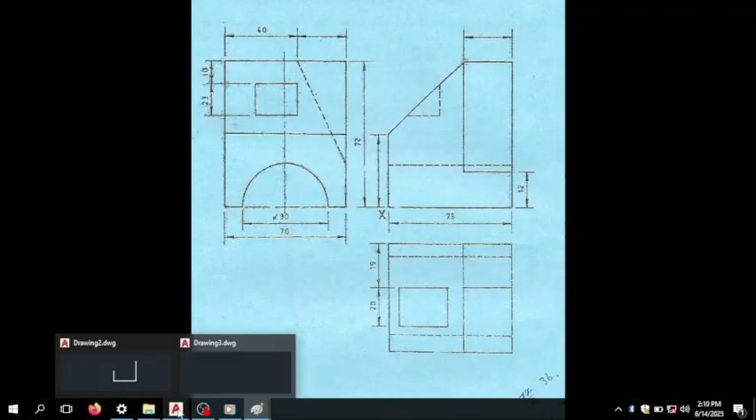Okay, so we are going to start with that. So we pick a line, and then pick a line. So our first point was 78, enter.

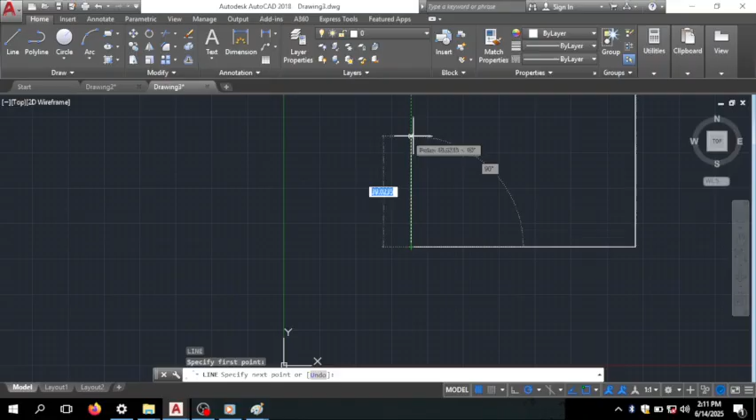Our point was 72, enter, and then 30, enter, and then escape, enter, from here was 36 because it's a half of 72, enter, and then we join here, join there, enter. So this is what you see on the front elevation.

Okay, so let's go to the end elevation where it is more detailed, and then we're gonna use the end elevation to abstract the image on the front elevation.

So this is the end elevation on this side here. As you can see, it's 40 from here up to a point somewhere there, and then there's a gap which has been left, and then there's this part here which you see on the end elevation, and then 70, and then there's something like a semicircle down there.

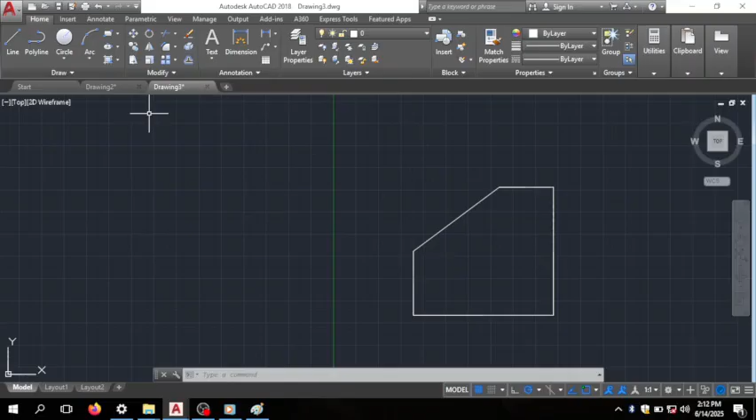Okay, so you come on this icon here which says isometric draft. Now it's off, you put it on, and then you select ISO left. Mine was default on ISO right, so you select isometric left.

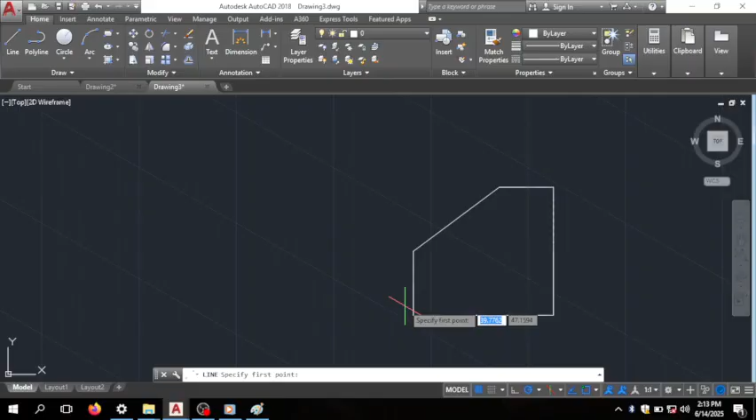So on ISO left, you pick a line, and then you start from a point somewhere there. So what were the dimensions? It was 70 on this side, and then upward it's 72.

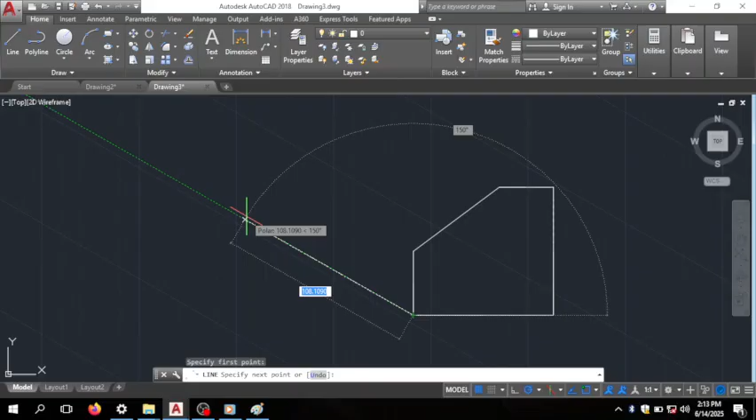So you come back on this, so it's 70, enter, upward it's 72 -- no, it's not 72, that's 72 first.

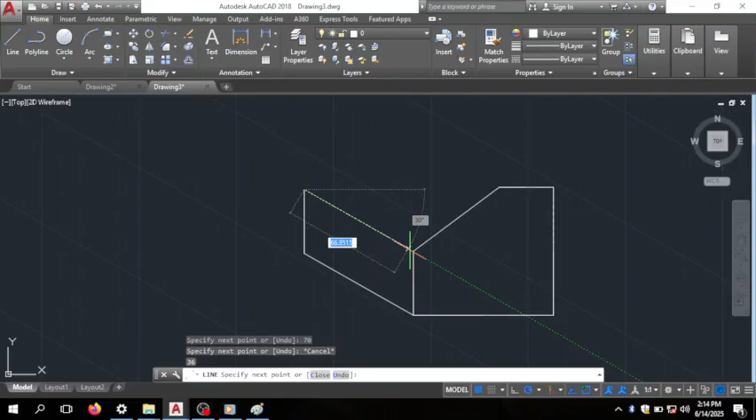This point here, up to a point here, it's 36, and then this point here, up to a point here, is 36. So we are going to pick 36 first, 36, enter.

So from a point here to a point there, it's also 70, enter, and then point there. So pick a line again from this point here, it's 30, enter, and then you join this line here.

So as you can see, our object is already appearing in a 3D manner. Our object has started already appearing in 3D manner, but it doesn't mean that we are done already. We're just on the first part.

So let's look at our image. Let's go back to our first angle projection. So if you look at this image, there's this semicircle here, which diameter is 30 centimeters, 30 millimeters, and then as you can see, there's a dotted line here, which means this hole here, or this semicircle, or this sphere, touches from this point up to the end point of this.

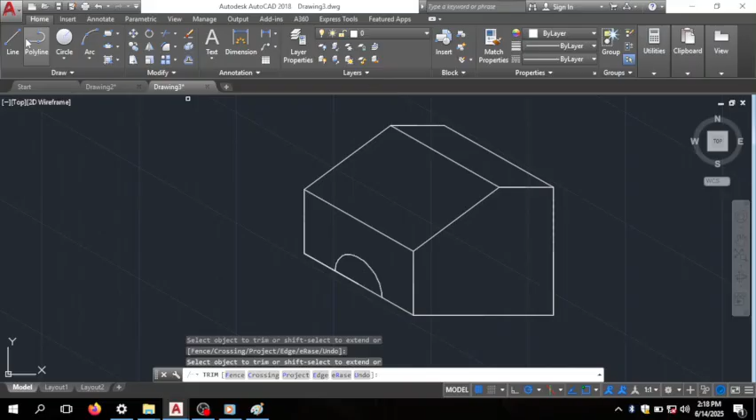Okay, so I come and select trim, and then you press enter just to trim away. You don't go on and start selecting the whole object. So as you can see, I've deleted that part there.

So I pick a line, and then from this point somewhere here, on its center. Okay, so from here to somewhere here is 70 degrees, 70 millimeters, sorry, with the degrees. Then I join there, and then from here to a point here, I just want to get the whole object.

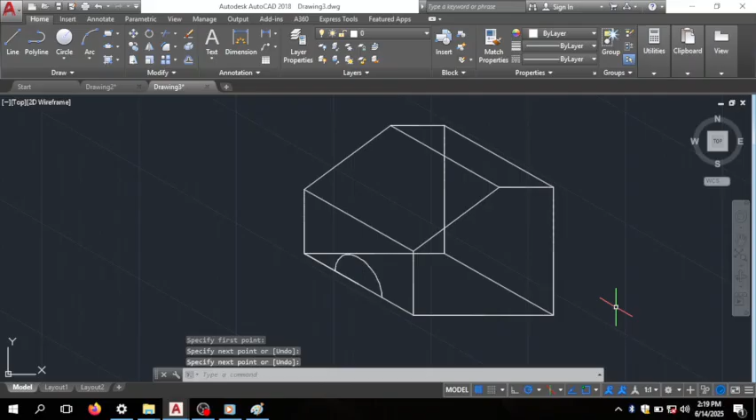Okay, now this is I want to draw here, come to a point here, so from here to here, how many centimeters were there? It was 78 from here to here, so 78.

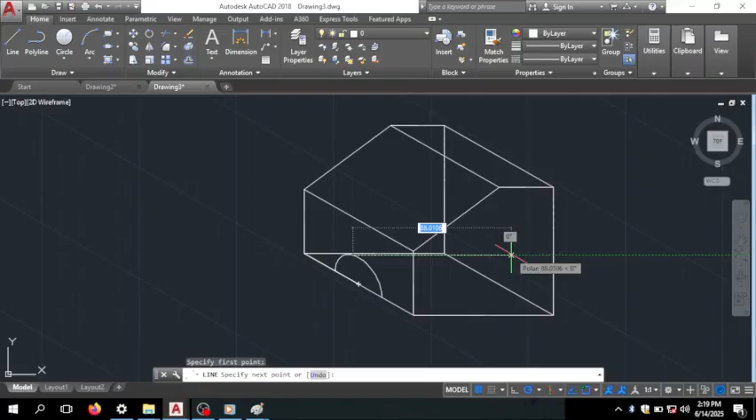So from here to a point here, it's 78 centimeters, 78 centimeters, 78 centimeters, and then I press enter.

Okay, so I pick another circle, axis end, the point, yeah, where the small rectangle appears is actually center of the circle. I have selected isocircle, so isocircle, select the point, specify the center of the circle, so specify the radius of the circle is 15, and then I come and trim, enter.

So you can see how the object is starting to look like, really look like. And then I pick a line. Let me just show you how the object appears, how the object actually is. So I pick a line there, and then enter, and then I pick a line, and then enter there.

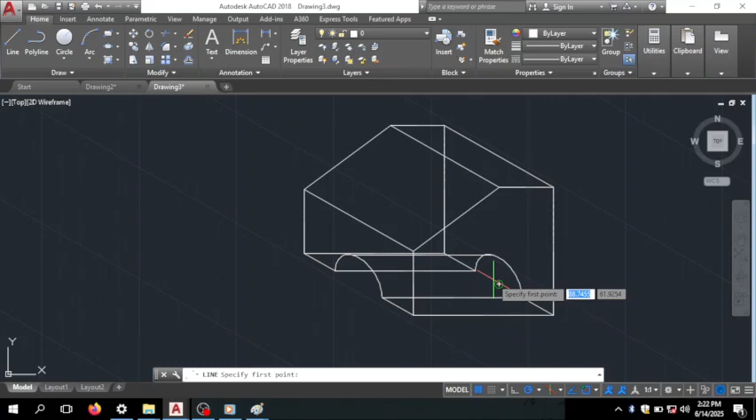If you come at this point here, there's a point here. So we want to show there's a hidden line along this block somewhere around here at the top. There's a hidden line at the top there, which said 40 centimeters.

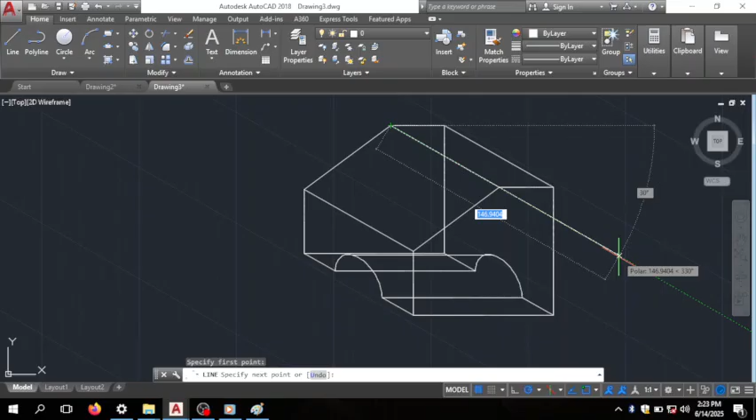Go back to our drawing and start looking. So from here to a point there, there's 40 centimeter. A line slanting until it touches the base of this circle, around somewhere there. 40 centimeter, a line slanting, so 40 centimeters from here. 40 centimeters, 40 millimeters, I mean. Why do I keep saying centimeters?

40 millimeters, okay, pick a line. You have already entered 40 millimeters. Let me just trim that one out. Enter. Let me just trim this one out. Let me select trim again.

Trim this one out. Okay, sorry for that. Trim this one out. Enter. Then okay, trim. Enter. Click this one. Okay, so from here, line, pick a line at this point here, touching at this circle there.

40 centimeter. Have you gotten how I've done it? And then so now we must delete this other part. We must delete this. So from this point to this point where it touches the circle at the circumference is 40 centimeters.

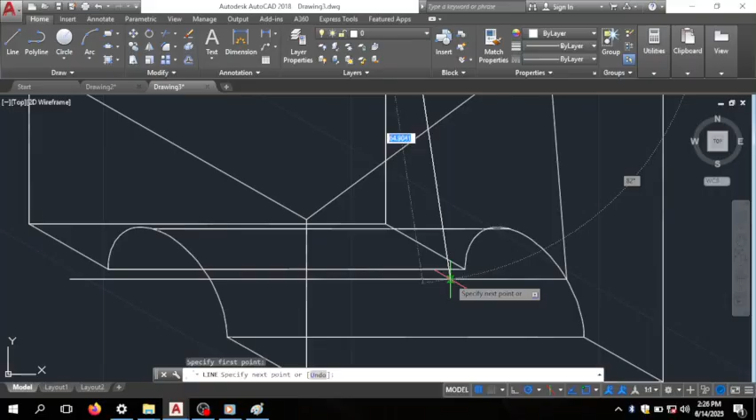And then this object will appear like this, because there is actually a hidden line there which touches this line here and at that point. So you see, that's how the object will be looking like, but it is invisible. So you come at this point before we remove this part and this.

Before we remove this part and this part, there's 12 centimeters somewhere. There's 12 centimeters. From this point up to this point, it's 12 centimeters. From this point up to this point, it's 12 centimeters. And then

30 millimeters from here. So 12 millimeters and then 30 millimeters. Okay, sorry with the part of centimeter, I'm used to centimeters, so from this part up to this part it's 30 millimeters, and from this point to this, that's on our front elevation.

So we come on the front part of the drawing, so 30 millimeters from, okay, let me just delete these ones so that they don't bring so much confusion on our drawing. Just delete those ones, but this one here, this line here which touches the circumference of the circle, from this point to the circumference of the circle, around that point, it's there.

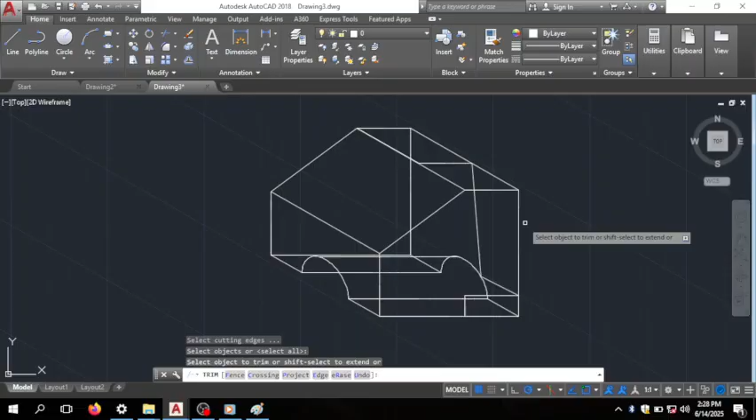So we trim these parts. This one is not there, this one here is not there. So trim this. Okay, this whole part we shall delete it.

Enter. Shall delete it. Pick a line. There's this one, this one starts from here. You join this place here. Enter, and then I delete. Now I'll start by deleting this one, so that we remain with only what we see.

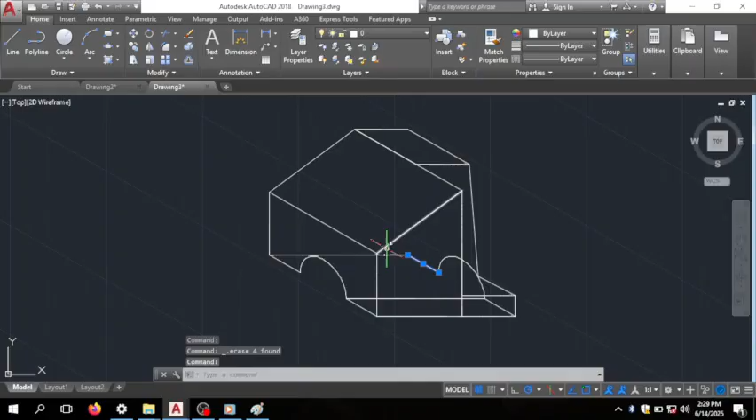We can only see these hidden lines there. We don't want to show them. These are hidden, you can't see them, you can't see this one also. They are hidden. We are not showing hidden parts on this object, so there.

So let's go back to our object. If you look at this object from the top, the front elevation, so it's 19, from this point here up to this point here, and then it's 20.

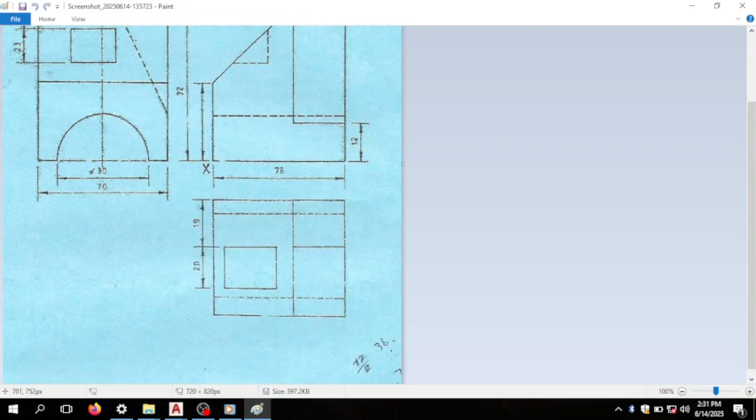Okay, let's go back to our AutoCAD drawing and then put that there. So it's 19 from here to somewhere here. Let me just draw that straight line there, and then from this point here to a point here, it's 20. So it's 20.

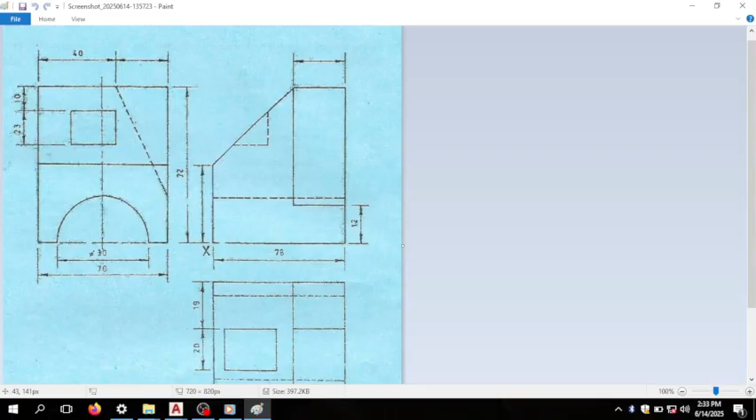Okay, that is done. So we go back to our drawing, and then 10 from this point, 10 millimeters from a point here to a point here, and then to a point here up to a point here, it's 23 millimeters. So from a point...

Actually it's the opposite, so we're gonna delete here. Let me just delete this one. This one is wrong. So 10 from a point here, and then 23. So 10 from a point here to a point here.

Okay, let me just Control Z back to the place where we are. So from a point here to a point here, it's 10, somewhere there it's 10 millimeter, and then 10 millimeter, and then it's 23 from a point here to a point here.

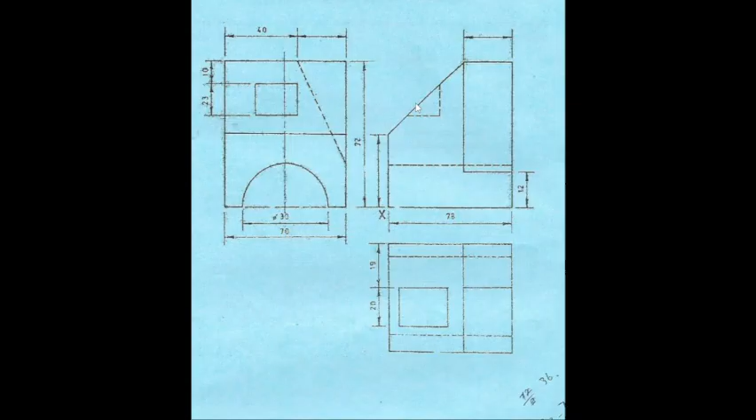Okay, so we have not been shown how deep it is on this side, because it should be deep. This side here should be showing how deep it is from here to here, but they did not show us. So you can pick any dimensions, so maybe I'm going to pick maybe 12. So from here, from this point to a point here, maybe I'm going to say it's 12. Say it's 12 by 12.

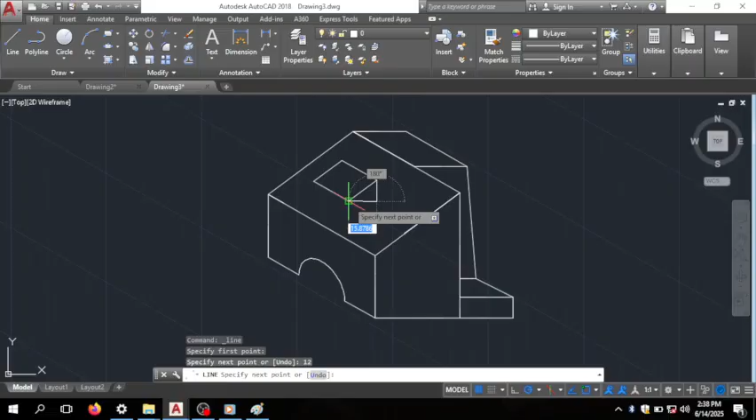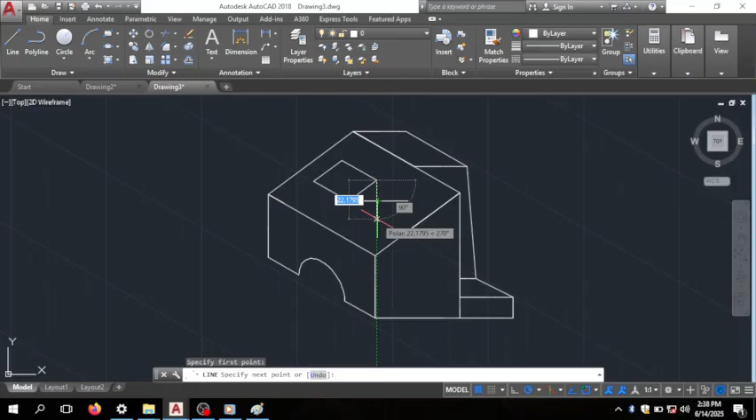12, enter, and then okay, you should not assume that, don't assume it's 12. We are just going to draw a line from here to maybe somewhere there, then enter. Where they're gonna meet, it's actually going to be our whatever point.

Okay, so I trim. You could use hidden lines, but for this point of mine, I'm not using hidden lines. That object is good that way, that's good to go. If you would like to maybe draw how it appears inside, just do it like that. Pick a line, enter, then you pick another line there.

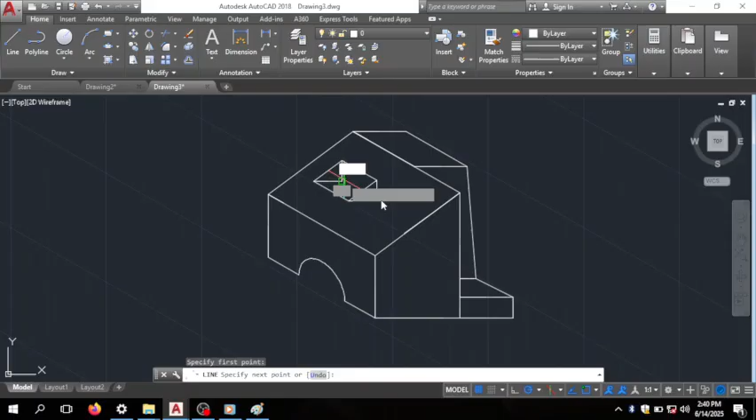And then I trim this unwanted line, and I trim unwanted part. So trim, enter, select this one and this one also, enter, and then pick another line just from here to here, enter. So that's how our object appears, and yeah, it should be like that.

So that I've seen, taken you through. So maybe you can delete some parts which you don't like, you can rotate it, you can do whatever with it. Thank you.